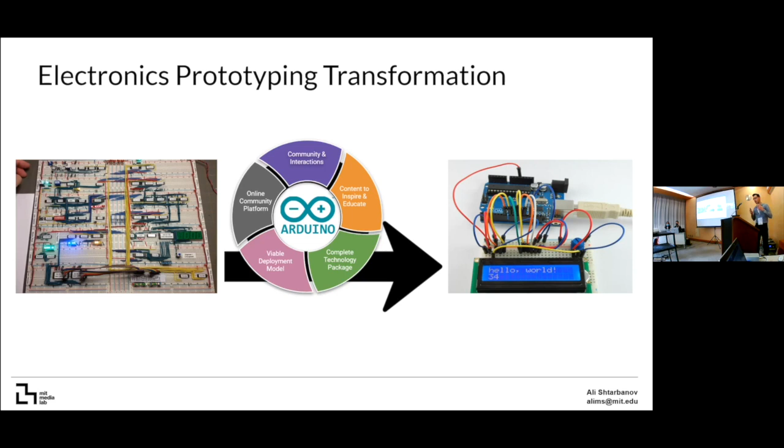And so over the past two years, I have been trying to capture the essentials of what it takes to design and deploy a platform for wide-reaching impact. And I identified 5 essential requirements.

First is to have a complete technology package, usually consisting of both hardware and software. The platform must be general purpose, easily extendable, and bring value not only to new users, but also to experts.

Second is content, to showcase what is possible with the platform and to inspire people to unleash their creativity. This should include projects made by different users, tutorials, and videos.

Third is the community and interactions. The community enables the platform to have a wide-reaching impact, not only because they can contribute inspiring applications, but also because of the network effect. The larger the community around the platform, the more valuable it becomes to everyone using it, as in the case of many other platforms taking advantage of the network effect.

Fourth is an online community platform, a website that can facilitate these interactions between people. Users need a place where they can ask questions, showcase their work, get help, and find collaborators.

And finally, what's absolutely critical is a viable deployment model. The platform must be available and accessible to people. People need to have a way of obtaining it. And this must happen in a financially sustainable way for the project to survive long term.

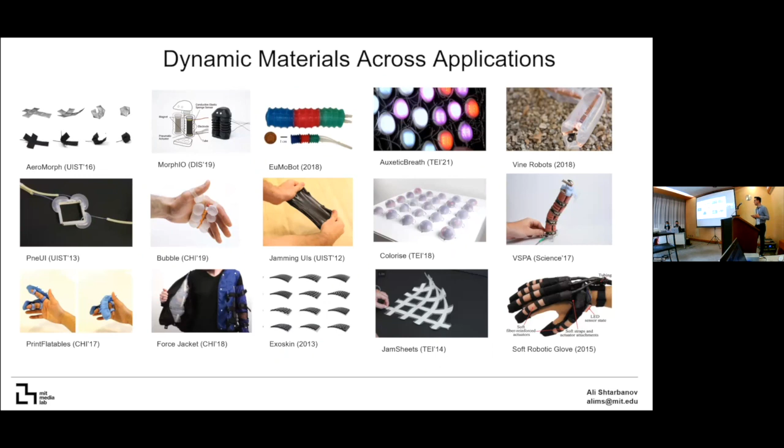However, when working on soft robotics projects, people usually spend the majority of their time developing electronics, software, and hardware rather than the actual application itself, which they're ultimately trying to achieve. This creates significant inefficiencies, stifles innovation, and even discourages the pursuit of many ideas. People then end up with projects like these where the control system is actually far bigger than the actual project.

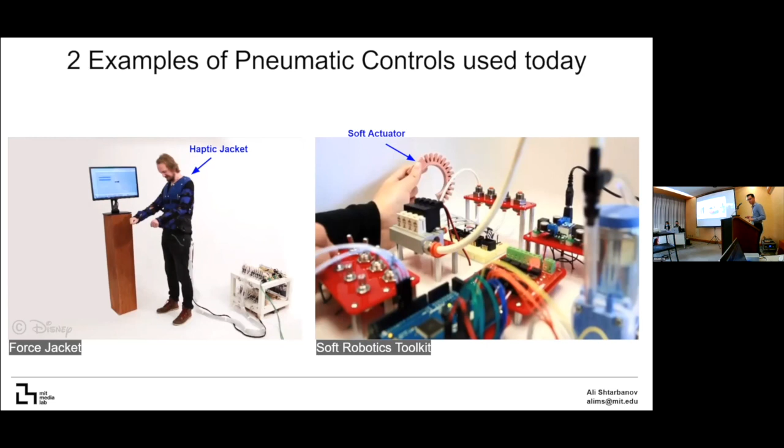What is needed is a general purpose platform, just like Arduino or just like Raspberry Pi, for actuation, sensing, and control of dynamic materials that is suitable for both experts and novice users, enabling them to rapidly develop new applications.

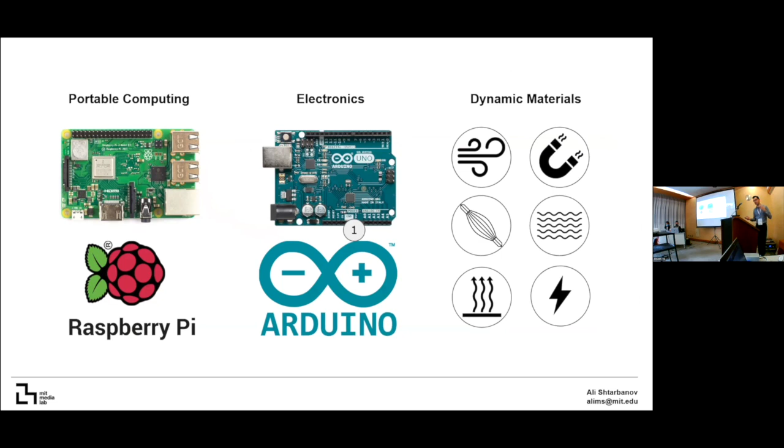Not just a single platform, but multiple platforms suitable for various kinds of actuation, including pneumatic, hydraulic, electromagnetic, and others common in the soft robotics field. However, the most common approach today, by far, in my view, is pneumatics.

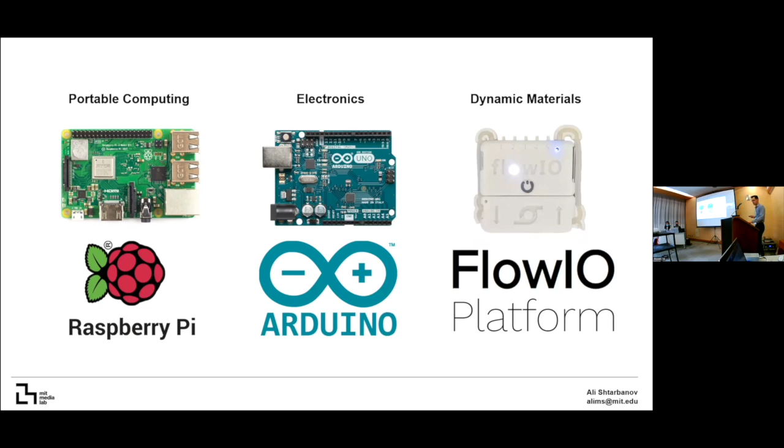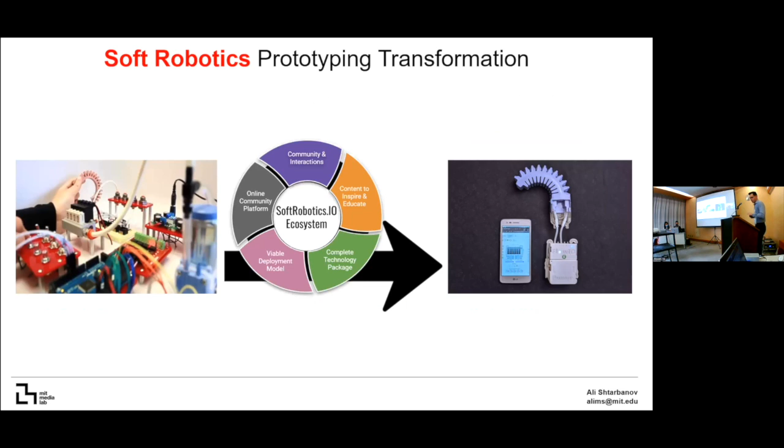That's why I began this journey by developing a general purpose pneumatics development platform called FlowIO. Inspired by how Arduino transformed electronics prototyping, I wanted to create a platform that would transform soft robotics prototyping in a similar way. But to achieve this kind of transformation and have large scale impact, I had to focus not only on developing powerful and user-friendly hardware and software, but I also had to create a whole ecosystem around it.

In the rest of my talk, I will summarize some of the work I have done across each of these 5 areas, starting with the FlowIO hardware and software.

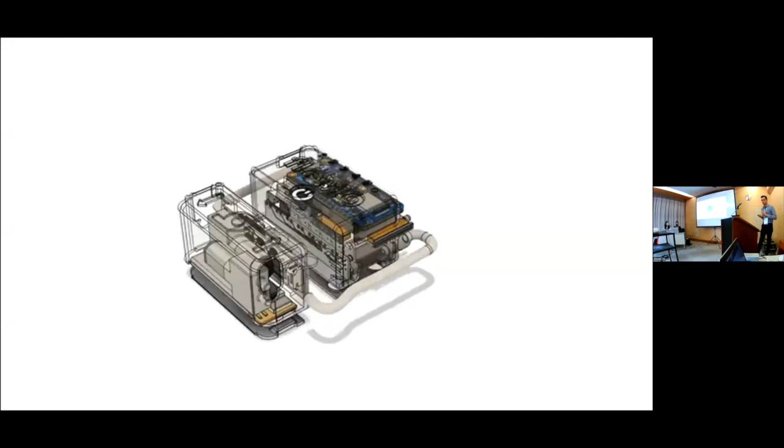FlowIO is the first fully integrated and truly general purpose miniature pneumatics development platform for actuation, sensing, and control of soft robots. FlowIO comes as a complete package of modular hardware and intuitive software that is highly user-friendly.

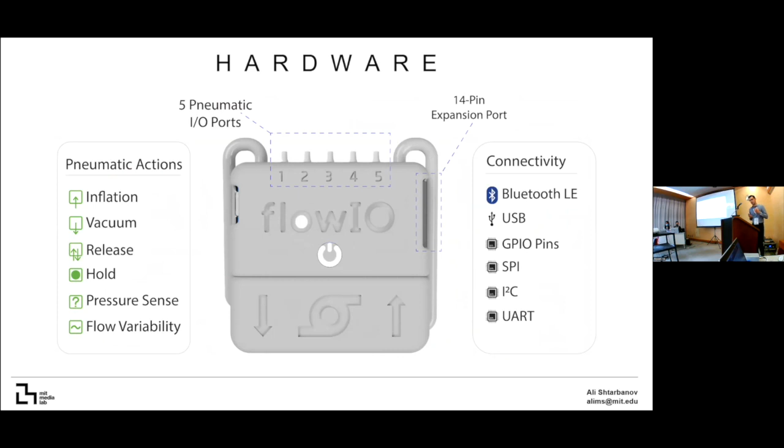It has 5 pneumatic ports where each port supports inflation, vacuum, release, hold, pressure sense, and flow rate variability. It has multiple connectivity options as shown on the right, and you can also connect multiple FlowIO devices together via Bluetooth if you want more than 5 pneumatic ports. The platform is fully modular and comprised of magnetically connected modules that can be swapped within seconds to satisfy different requirements and user needs.

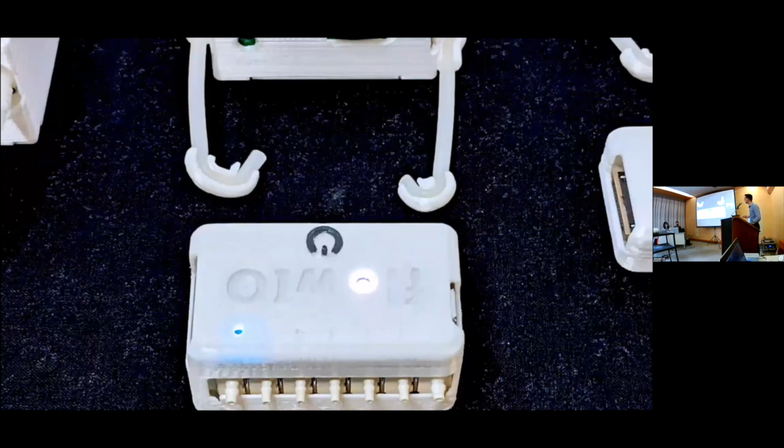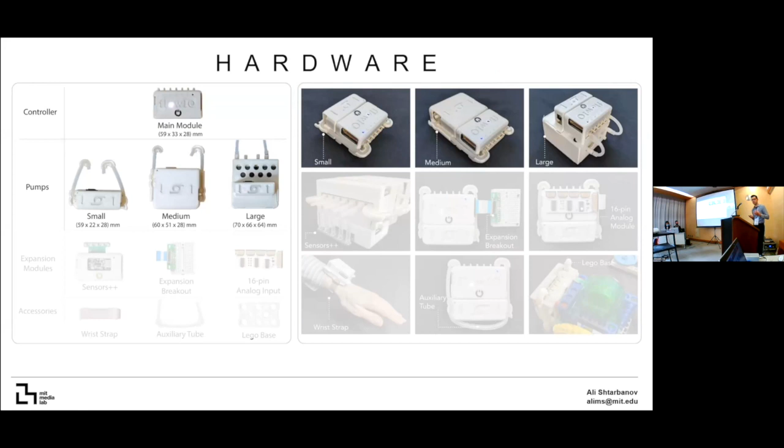A main module serves as a pneumatic multiplexer with various sensors, and 3 pump modules enable FlowIO to satisfy different needs for pressure, flow rate, and size just by choosing the appropriate module. Expansion modules and accessories provide additional sensing, control, and mounting capabilities.

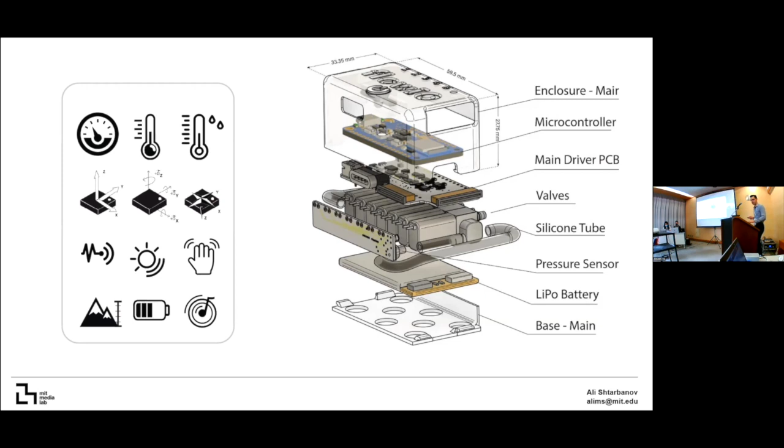The main module contains 7 valves in a manifold configuration, 2 custom-made circuit boards, a microcontroller with Bluetooth, as well as a 600 milliamp hour LiPo battery that powers the device, and there is also an integrated battery charger. Additionally, there is a large number of sensors, about a dozen of them, including proximity and IMU, and all of this fits inside a very compact 3D printable snap fit enclosure.

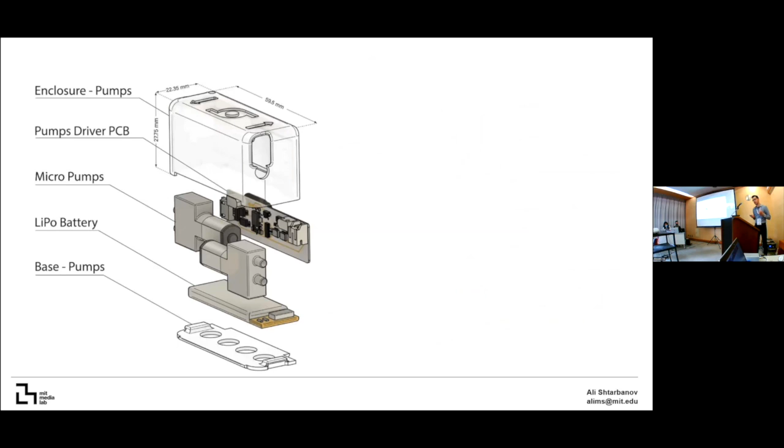One of the pump modules is shown here. It has 2 pumps, a 500 milliamp hour LiPo battery, a PCB with power electronics, and it also has its own battery charger. Thus, you have a fully integrated solution requiring no external pressure or power sources. The entire device with the small module weighs only about 110 grams and can even fit inside a pocket.

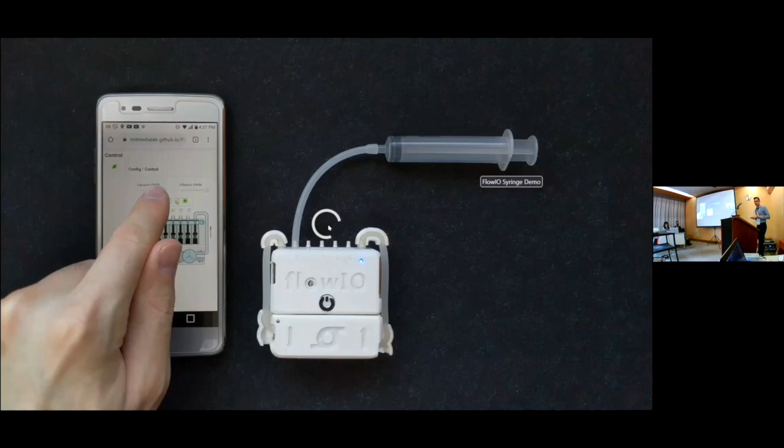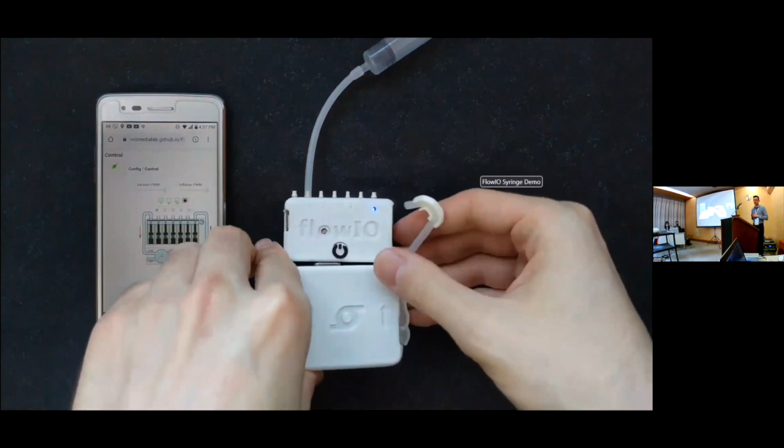Here I show a comparison of the inflation and vacuum capabilities between the small and the medium pump modules. I also demonstrate how you can easily swap one set of pumps for another, even with the device on, without any interruption of the Bluetooth connection.

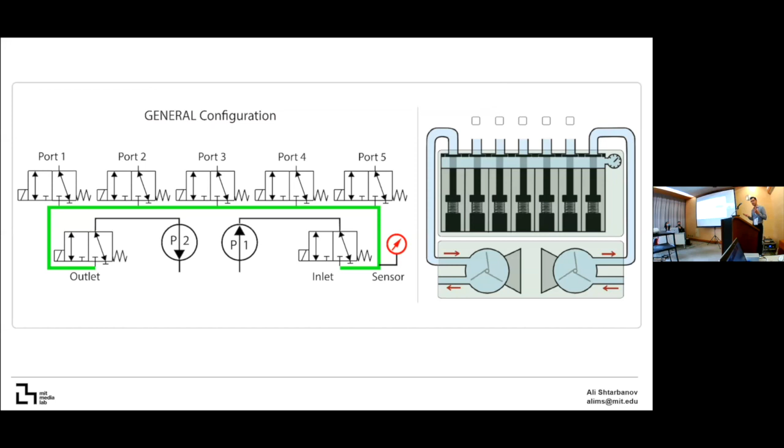Here is the pneumatic circuit for FlowIO. There are 7 valves connected to a manifold shown in green and 2 pumps. There is also a pressure sensor connected directly to the manifold line. In this general configuration, 1 pump is used for inflation and the other for vacuum.

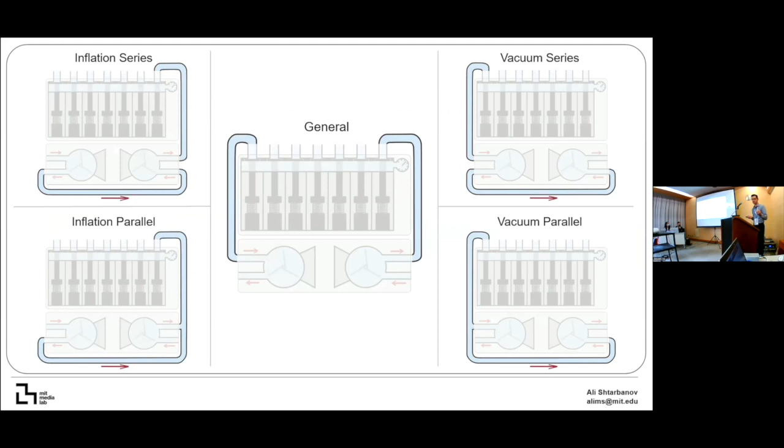For instance, in the general configuration, with the medium module, you can have pressure ranges from -13 psi to 22 psi, but if you change modules and configurations, you can achieve pressures as high as 30 psi.

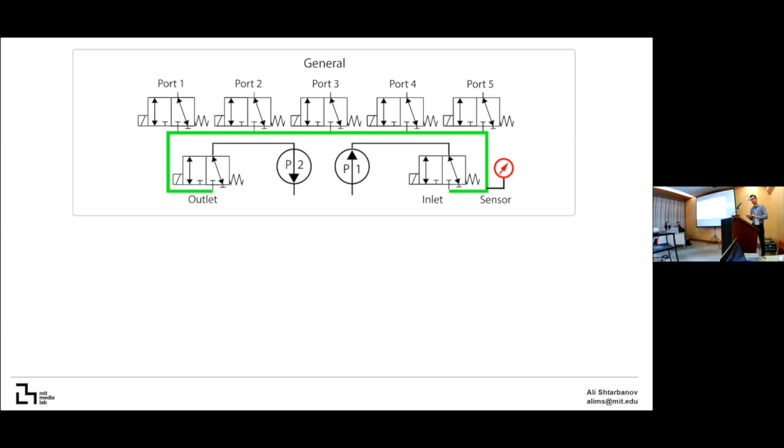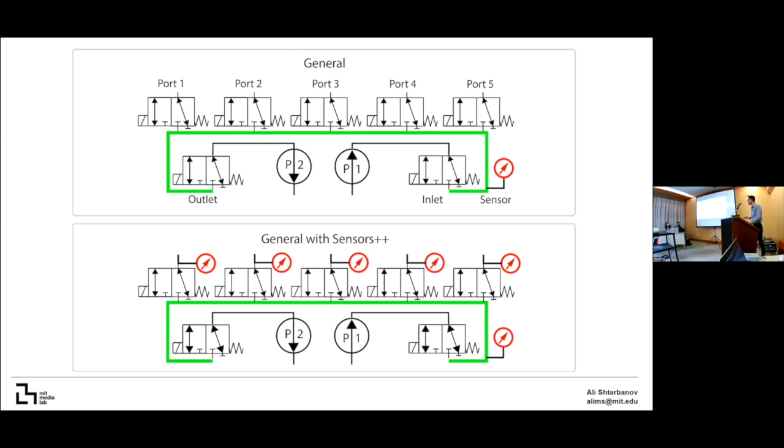A limitation of this pneumatic circuit is that it uses a single pressure sensor to monitor pressure across all 5 channels via time multiplexing. And while for most applications this is sufficient, there are some applications where a single pressure sensor is limiting. That's why I developed a module which I call Sensors++, that provides 5 additional pressure sensors at the outputs of the 5 ports. This is how the module looks, and it goes underneath the main one as shown on the image.

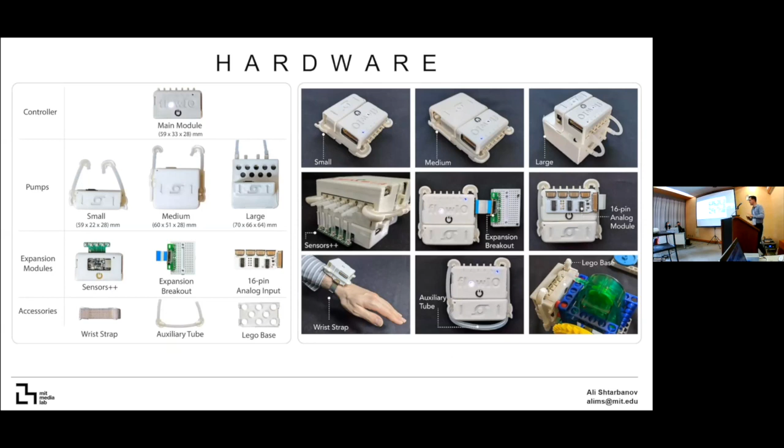There are many other modules for different sensing and actuation needs, including 2 new ones not even shown here, and I talk about those in my extended talk, but I won't go into details here.

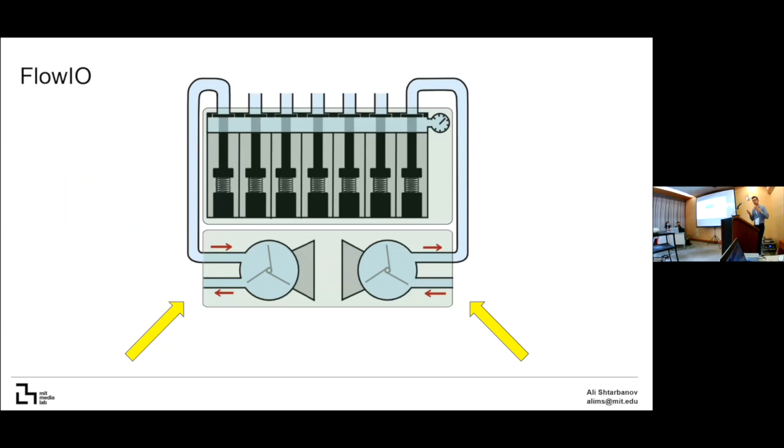The pumps of FlowIO are open to the external world, as shown by the 2 arrows, but you can easily convert this to a fully closed system by connecting those to an air tank, or you can even connect them to a water tank, and now you have a hydraulic system, not just a pneumatic system.

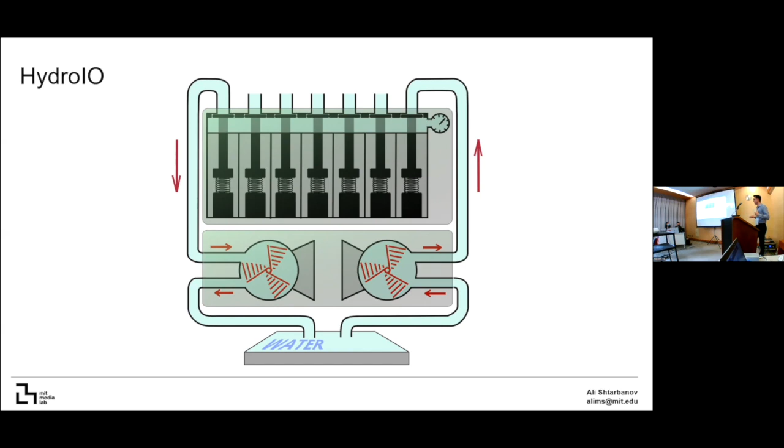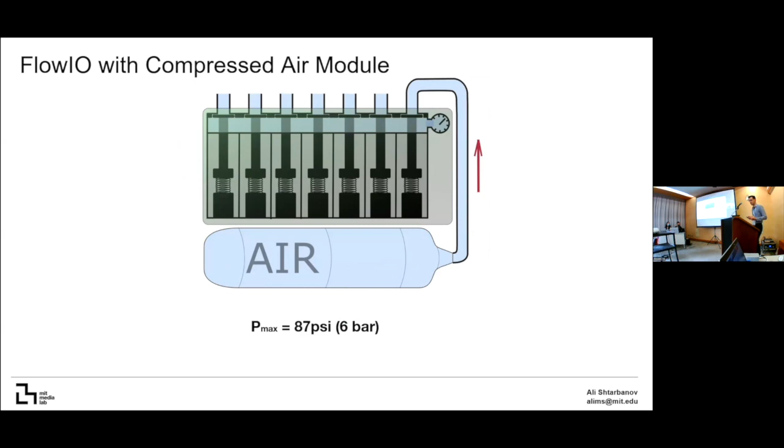Finally, you can also replace the pump module with a compressed air tank to achieve much higher pressures. We were successfully using this configuration to achieve pressures of 70 psi and used them in a project. So that was hardware.

Now let's move on to software.

FlowIO has a graphical user interface and multiple libraries and APIs, making it suitable for people from any technical background. The graphical user interface was built in JavaScript and implements the Web Bluetooth protocol, which allows your Google Chrome web browser to directly connect with a FlowIO device. This enables you to control FlowIO from any device and any operating system that supports Google Chrome, and the best part is that you don't have to download or install anything.

You literally simply have to, if we play this... maybe it's the country. Oh, okay. I'm gonna skip this video then. Let's try this one. Okay, so it plays on mine, but not sure why it doesn't play on that.

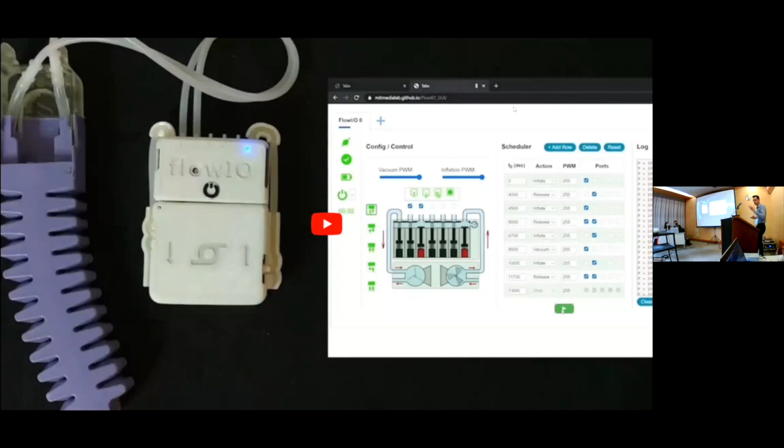So task scheduling is also possible on the interface as shown in this example, and users can create a sequence of any number of tasks. An interactive graphic on the left shows the state of each internal component of a connected FlowIO device in real time.

Users can also write their own code for FlowIO, with APIs and libraries developed for both Arduino and JavaScript. Shown here is the software stack for FlowIO, which one can choose to work at any layer of. At the bottom is a pneumatics driver, which controls primitive tasks involving single pneumatic components.

The second layer of the stack is a pneumatic API controlling entire activities and combinations of components, which is an abstraction of the driver layer. The third layer is what I call the command API, and it makes every feature of FlowIO accessible via 3-byte commands.

All of this functionality is then further abstracted into a set of 7 Bluetooth services with 15 characteristics. A layer above that is a web API, a JavaScript layer that allows you to connect to FlowIO via Bluetooth directly from your web browser. A unique feature of this layer is the ability to control up to 7 devices simultaneously and synchronously.

On top of that is a graphical user interface that implements just a few of the characteristics of the previous layer. The final layer is peer-to-peer networking, allowing FlowIO devices to communicate with other FlowIO devices across the internet. This one is still in development, and it opens a whole new world of application possibilities, such as remote collaboration and remote telepresence.

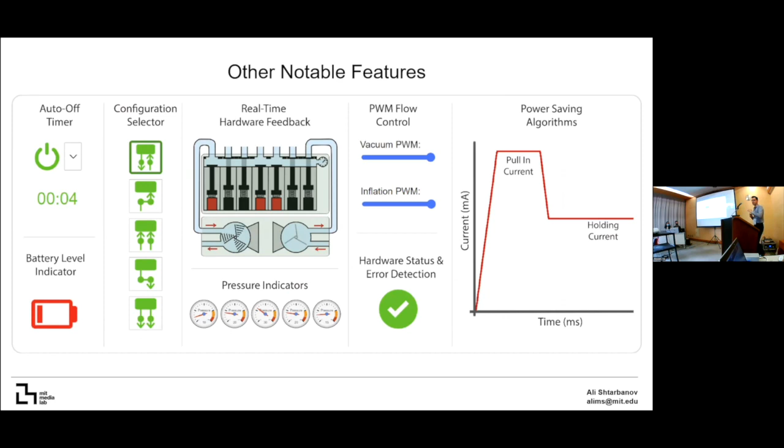But once the valve is open, you can actually reduce the current just to maintain it in the open state. This allows me to reduce battery consumption by about 50%, and it also prevents the device from overheating.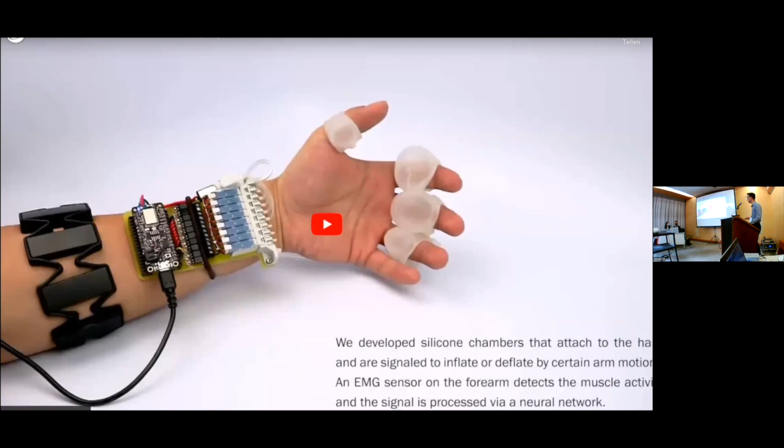The projects to date fall into the following categories: haptic feedback, interaction design and art, assistive technology, locomotion, fun and play, and wellness. In the next few slides, I'm going to show you quickly some of the projects we have already published. Bubble is a wearable system that enables grasping augmentation without bending the fingers.

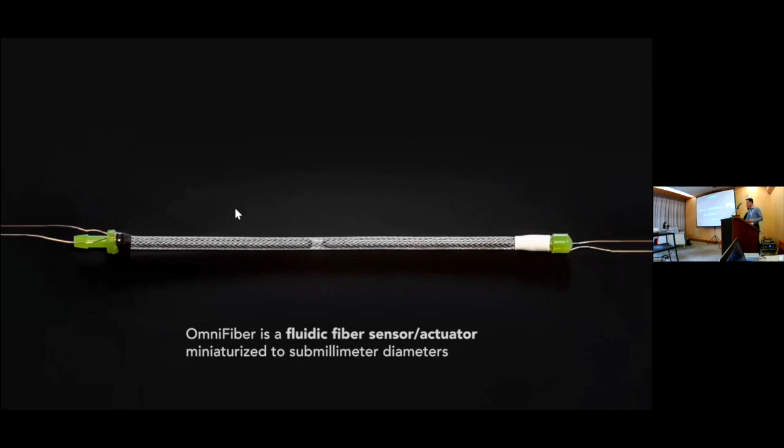OmniFiber is a reconfigurable fiber technology for designing movement-based interactions using thin fluidic fiber actuators with strain control.

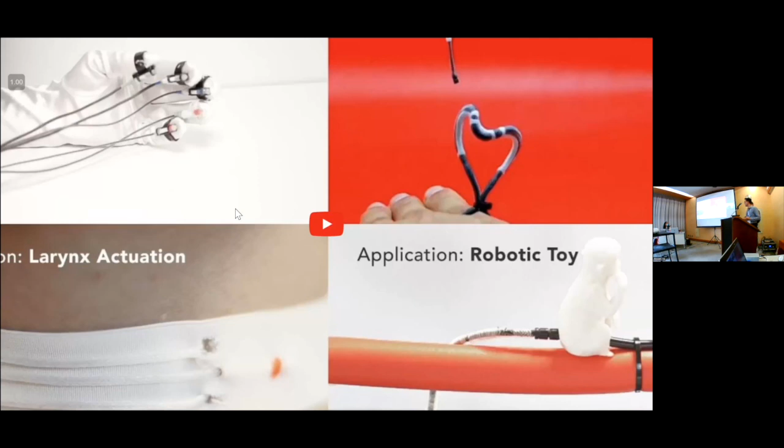And Three Voices is an opera performance done in Sweden that augments the listening experience with tangible interactions. It uses OmniFiber and 18 FlowIO devices synchronized to the rhythm of the music to deliver haptic feedback to listeners, enabling a very immersive listening experience.

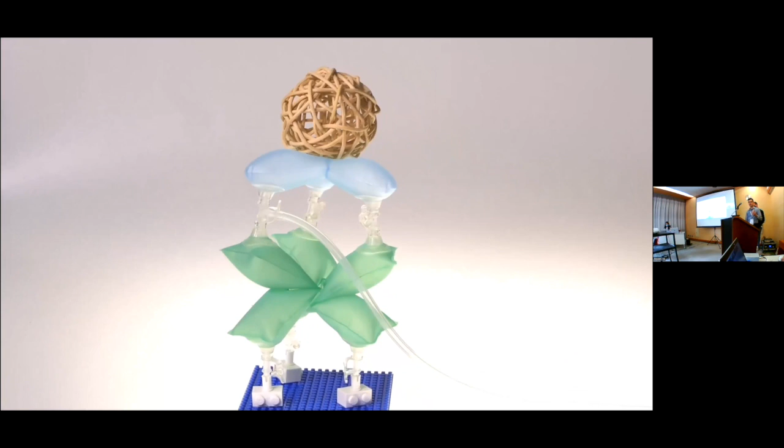PneuBots is a modular construction kit for playful exploration of soft robots. It consists of 7 types of self-foldable segments with high tensile strength, and the kit enables various assemblies to be made with the modular pieces, allowing people to explore soft robotics in playful ways.

We even had a FlowIO device go into a zero gravity flight, which is a peristaltic suit project. This was published this week. The goal of this project is to reduce some of the negative effects caused by prolonged exposure in microgravity environments. And these are just a few of many other projects enabled by FlowIO, which brings us to community and interactions.

Here is a traffic map of the softrobotics.io website with over 8,500 unique visitors from every part of the world. FlowIO devices have now been used by dozens of people in about 10 countries. Many of those have been provided as a resource that can be shared across multiple people at those locations, as in the case of research labs.

Here are some statistics about the community. There have been about 200 project proposals submitted to date, and of those, about 20% have been accepted to receive FlowIO devices. The project has also won many awards in research, engineering, and design.

Last year, it won first place at the ACM Student Research Competition at CHI, as well as the Hackaday Grand Prize. And just this month, FlowIO was announced as the winner of the Create the Future Grand Prize award, with the ceremony happening in a couple of weeks.

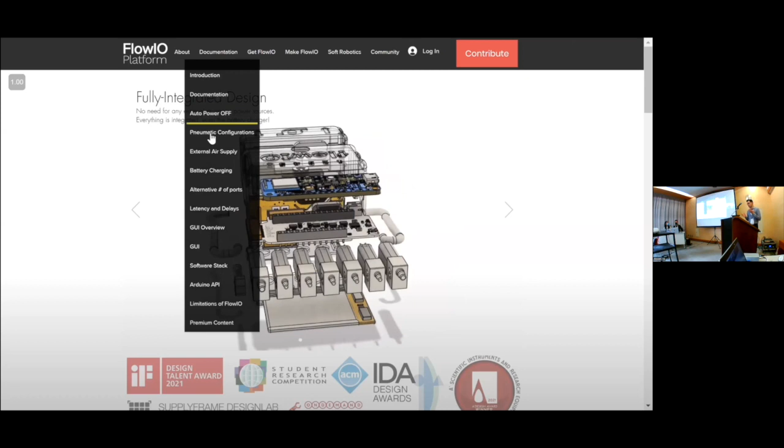The community aspect of this project, of course, would not have been possible without the softrobotics.io website. On this website, you will find detailed information about the project, including the motivation behind it, videos, documentation about FlowIO, and the graphical control dashboard.

Under the community tab, you will find the history of projects created by the community, demonstrating different application scenarios and offering inspirations for new users. If you create an account, you can also access an 18-chapter tutorial on how to replicate this device.

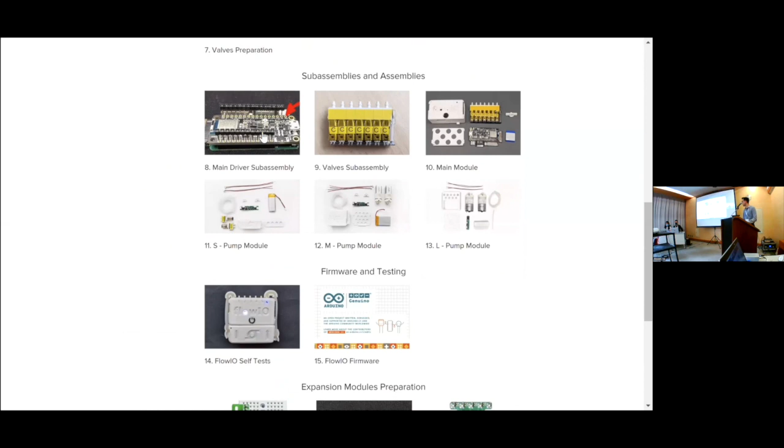This brings me to the final component of this framework, which is having a viable deployment model. Each FlowIO costs hundreds of dollars to make, and yet I wanted to make it widely accessible to people with creative application ideas. So for inspiration, I studied deployment models and initiatives and philosophies from various other projects. However, none of those were directly applicable to my objectives.

But after taking some of the best parts from all of these concepts and leaving other parts out, I came up with a new deployment strategy, which I named Creative Commons hardware, meaning hardware for creative applications belonging to the public commons.

Under this model, the project is supported by donations, and any new units created are available to be borrowed freely for a limited time in exchange for any contribution made by the borrower. Contributions can be hardware and software development, writing tutorials and documentation, creating a YouTube video, helping with fundraising, graphic design, or anything else that helps the project grow and evolve.

Once a user finishes using the device, they're expected to return it so someone else can use it, or pass it on directly to another user. In this way, the contributions made to the project benefit not only the entire community, but even the person making the contribution. So I released FlowIO to the world under exactly this distribution model.

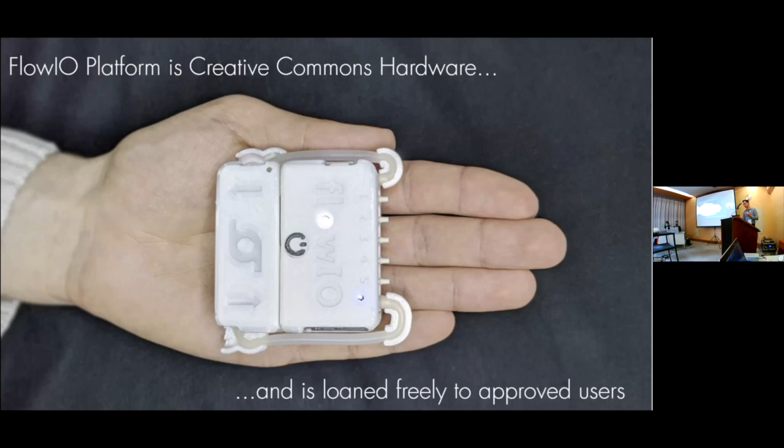The device itself is provided freely to be borrowed to approved users who can do great things with it based on an application proposal that they must submit between 200 and 500 words. The number of devices in circulation is determined by donations.

The future goals for this work are to develop all of the platforms in this series and then go through all of the stages of this framework. A vision for the softrobotics.io website is to become a go-to place for anything having to do with soft robotics, just like Adafruit is for electronics, or Stack Overflow is for programming.